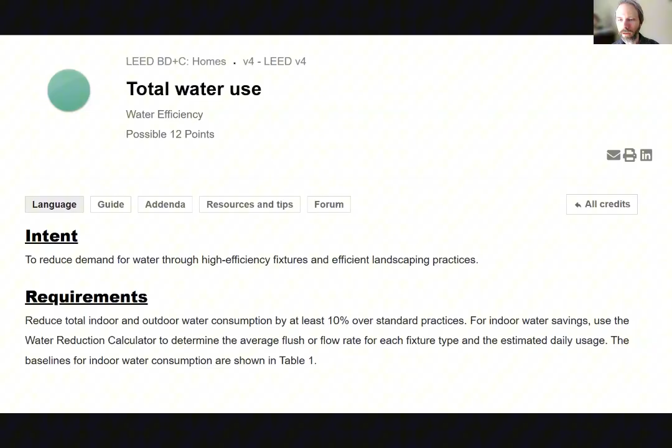Now, you can see here the points associated with the LEED pathways depending on how much water you can save and what reduction over the baseline, both including indoor and outdoor, which we'll get into in the checklist a little bit later at the end. But you can just see your corresponding reductions to point savings in the total water use pathway.

Now, a quick note for all of our friends outside of the United States and Canada, you will not be using the EPA tool, but instead you'll be using the USGBC's developed outdoor water use reduction calculator to evaluate your project. This is also the same as they use everywhere on the commercial rating system. With that being said, I don't want you to leave.

I think there's many tips and tricks we're going to discuss today that are going to help you consider how to save water. And because this tool was basically designed off of EPA's tool, I think you'll find value in this session to help you understand how to more accurately fill that one out.

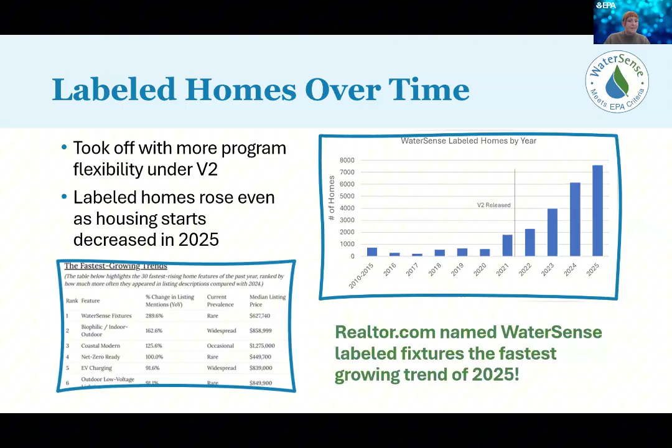And speaking of WaterSense labeled fixtures, version 2 of the specification includes just two mandatory requirements. A home must include WaterSense labeled plumbing fixtures, and they must be free of leaks. Beyond that, as I mentioned, the home also needs to be at least 30% more water efficient than a typical home on the market.

And version 2 of the WaterSense home specification, specifically for landscaping, has no mandatory landscape or irrigation requirements. Instead, outdoor water use is addressed in each of the HCO's certification methods in their own unique ways. We really rely on the HCO's certification methods to evaluate a home's outdoor water use. Reductions in outdoor water use are, however, still very vital to meeting that 30% requirement. It isn't really possible for a builder to reach that 30% goal by reducing indoor water use alone to achieve the WaterSense label.

Even though builders are not required to use the water budget tool anymore, it can still help them design landscape and irrigation systems that are more water efficient. And to be extra clear, we didn't remove the requirement for using the water budget tool because the tool isn't effective. We did it to give builders more flexibility and to rely more on HCO's existing infrastructure to evaluate the home's overall water use.

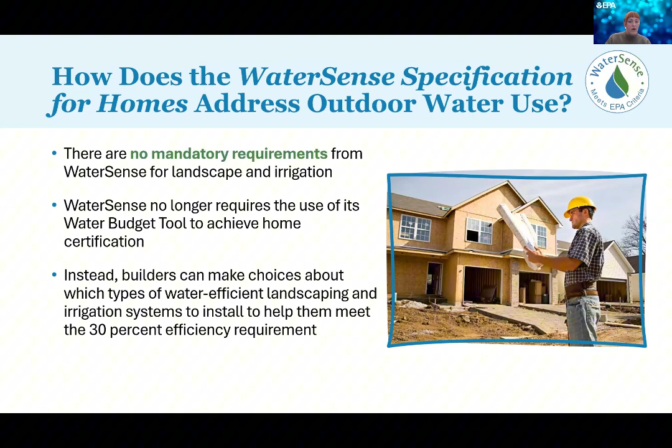And then again, to achieve the 30% efficiency requirement, builders choose a WaterSense home verifier and an approach using one of WaterSense's 4 approved HCOs. Each HCO has a certification method, which EPA reviews and also approves for ensuring a home uses 30% less water compared to typical homes in a variety of climates and regions. For example, if a builder is using RESNET's HERS H2O method, they should look for a score of 70 or lower to ensure the home is 30% more efficient than typical homes in order to earn the WaterSense label.

And similarly, there are maximum performance scores under the CHEERS WaterSense method, Green Builder Coalition's Water Efficiency Rating Score, and Home Innovation's Water Rating Index. Home Innovation Research Labs also has a prescriptive method where a builder incorporates specific practices with the National Green Building Standard to meet the 30% efficiency goal.

Home verifiers are trained through individual HCOs and verify homes meet the HCO's methods, requirements, and performance thresholds. WaterSense oversees all these HCOs. We review any changes to their organization structure or certification method. And so, although HCOs effectively manage the certification and work directly with the home verifiers, EPA does have a fairly tight control on what the HCOs can and can't do. By approving these qualified organizations to utilize their existing certification process to certify and label homes for WaterSense, we are able to leverage an existing infrastructure.

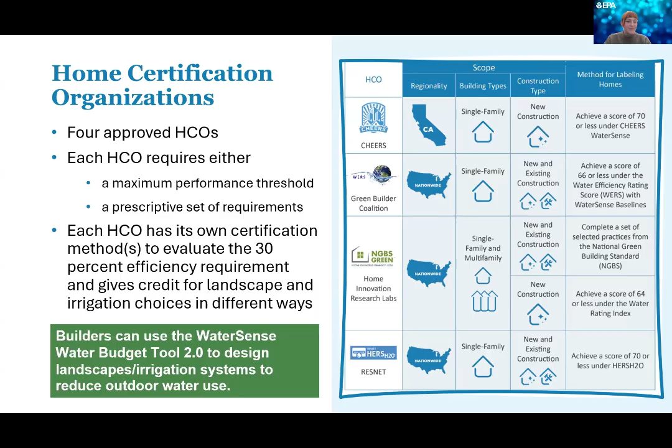Awesome. Thanks, Sarah. And hi, everybody. Still see my screen? Everything's good? Tech check? All good. Yes. Okay, good, awesome. Did you have a question, Brett, or are we good to continue? Just letting you know I could see your... Okay, awesome.

Thank you. So I'm Holly Cannon. I am with ERG. We are a contractor to the WaterSense program. We've been supporting them, and I've been supporting them since the program's inception in 2006. So it's been a really great, wild, long ride. I love to see that slide that Sarah showed about the growth of the homes program specifically. Being around for so long, it's really cool to see when you make a big specification change like that have such a profound impact on the number of labeled homes we're seeing, the amount of water we're saving. The program is just super great, super awesome. So thank you for being here to hear about it and hear about the water budget tool.

So late last year, my team helped EPA revise the water budget tool to include new data and assumptions that we have, and hopefully, like Sarah said, make it more usable for a variety of audiences now that it's not required by the specification anymore. I had originally set this presentation up just to talk about the changes from version 1 of the water budget tool to version 2, but I realized some of you may not know what the water budget tool is at all. So I'm going to quickly cover the basics.

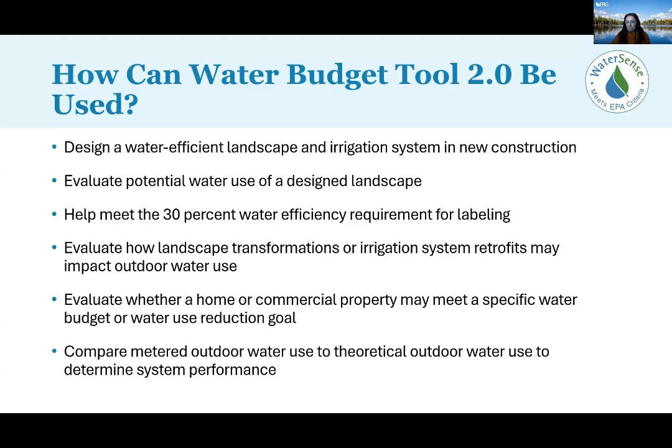We'll talk more about this. This is not the main use case, and I'm not saying everybody should go out and look at their water meter data and compare it. There are certainly caveats here, but that is one scenario that we'll talk through. And then Brett, as Sarah mentioned, will talk later about the LEED correspondence.

So without further ado, let me just stop sharing this so I can pull the tool up. And Brett, you can tell me if I'm doing this right once I get it going here. Okay, awesome. And are there any questions you want to get to? Go ahead. Okay.

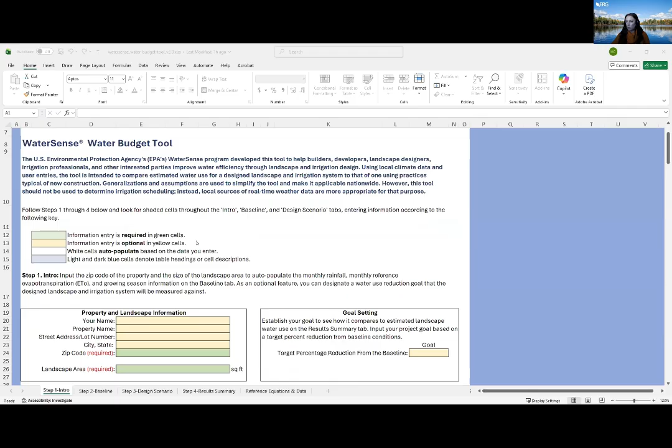Yep. Okay, cool. So here's the water budget tool. For those familiar with version 1, it looks quite a bit different. We have 4 main tabs of inputs and some references and equations and data. But this step 1 page really just gives you some background. It talks through what our color coding means.

Only green is required information. Yellow is sort of optional depending on your use case. White is going to auto-populate, and then any blue coloring is really just formatting, so that's ornamental. And this tab tells you what each tab is for, what they do, what date this was updated. It provides you the link. It's our baseline information tab.

I have three scenarios I want to walk through today, but I'll walk through the first one and then I'll talk to you about the background equations, so you can first see how it operates. We'll go through the equations and then we'll do two more quick scenarios. Hopefully we have time for that.

So my first scenario here is, and in an ideal world you'd fill all this out, but we're not going to do that, my Utah new build, and all of my examples are single family. Brett, right before this, was like, "Hey, do you have a commercial scenario?" And I don't, but he does. So good news there. So we're going to work through some single family scenarios here.

In this hypothetical scenario, I'm going to build a water efficient landscape and irrigation system that's going to reduce water use by at least 30%. So here's where I can put in my goal. So I'm looking for 30%. And I am in South Jordan, Utah, where there's a lot of new construction.

South Jordan, Utah also has several outdoor requirements in their local municipal code. So when I'm using this tool, I want to make sure I'm incorporating those requirements that they have. So I'll go ahead and put in my South Jordan zip code, which is 84009. And my landscape is going to be about 3,100 square feet.

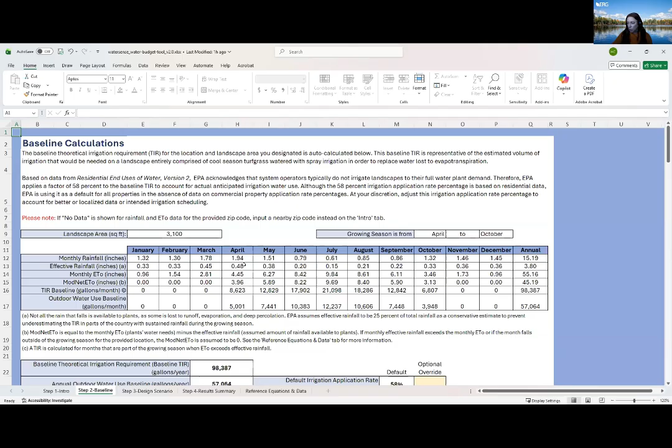So what I did instead is this zip code is for sort of the western side of South Jordan. I looked over at the eastern, central, more developed sides, and I'm going to plug in their zip code because I think it's close enough. And that's going to help me still get the right plant ET and rainfall and all that. Okay, so I'm all good there. I've corrected that zip code. All this data is being pulled in. Again, white means I don't have to do anything. So it's all auto calculating. It's pulling in the landscape area I said, and then it's calculating all this information.

And so what this is doing here is it's pulling in my monthly rainfall in inches for that zip code. And then we are calculating what the effective rainfall is. That's the rainfall that we believe is going to actually be usable by the landscape. And we're assuming that it's 25% of the monthly rainfall. That's a kind of baseline conservative estimate that WaterSense uses for effective rainfall. Then it's pulling in my monthly ET. And I'll talk about what these sources are once we review the reference equations and data.

And then it's calculating my mod net ET. So my mod net ET is going to be my monthly ET minus my effective rainfall. That's what my plant is going to need. So my plant needs its ET replaced, but if we're getting enough rainfall, in fact, if we're getting more rainfall than ET, this mod net ET may show up as a zero. It's going to say rainfall's got you. You don't need to add anything else to this landscape. It's also going to show up as zero here if you are outside of the growing season.

And this is a major new change that we added. So again, I'll talk through on the reference equations and data tab how we got there. But up here, you'll see that for South Jordan, Utah, my growing season is April to October. So any month that is not in those months is going to show up as a zero. My theoretical irrigation requirement baseline is going to populate here, and I'll talk about that equation again on the reference equations and data. And then my outdoor water use baseline.

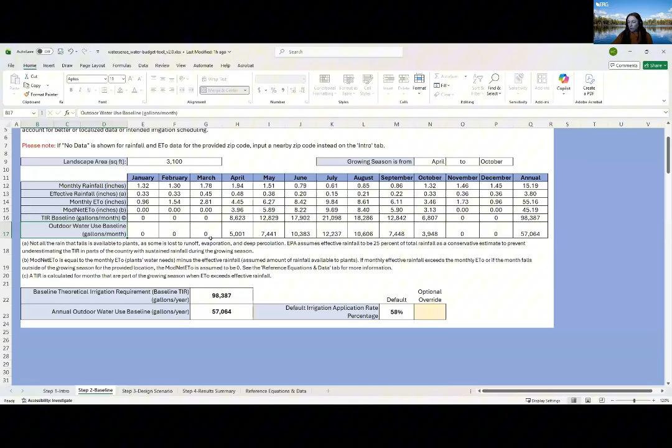So the outdoor water use baseline is calculated based on that TIR, but it's applying that irrigation application rate percentage that I talked to you about. And we have this information up here. So based on information from the residential end uses of water study, we are acknowledging that operators are not irrigating landscapes to their full plant water demand. That study indicated that users are actually putting about 58% of the baseline theoretical irrigation requirement on the landscape. So we're applying that application rate of 58% to that baseline. So we're assuming this is actually what the user is going to do. Okay, that's your outdoor water use baseline.

Now, you can adjust that if you know that you're applying more. In one of my scenarios, we'll talk about this, kind of keeping up with the Joneses next door. They got a really green yard. I'm applying more than maybe I want to or would. If you have a better number for this, we're allowing you to override. We've also anecdotally heard that commercial system operators typically apply closer to 100% of the plant demand. So if you have a commercial landscape, or multifamily, maybe you might want to set that in there and assume your baseline is higher than what we're assuming with this 58%.

Let me see if I have anything else on this slide. I think that's it. Okay. So this is our baseline. It's all calculating. We're going to go over to our design scenario. So let me explain.

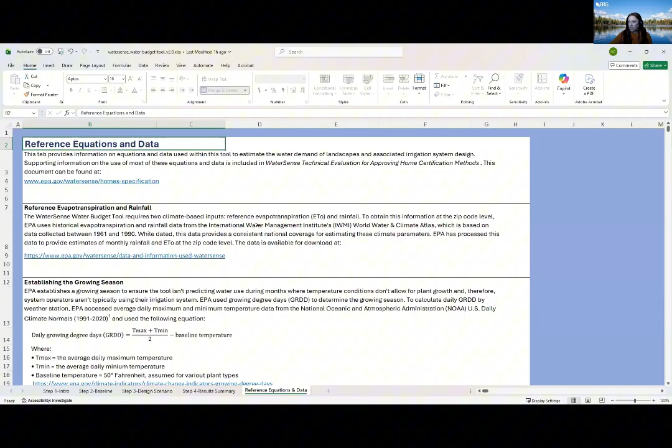Our reference ET and rainfall, we're using the same sources we used in version 1. It's the International Water Management Institute's World Water and Climate Atlas, and that has an average monthly ET, maybe even daily, from 1961 to 1990. So it's a little bit dated, but we've looked for a better source, and we really feel like this one just provides the best consistent national coverage for estimating these climate parameters. And we've processed that and provided all the data here at the zip code level. So this is both reference ET and rainfall from that same data set.

So then we established the growing season, which we felt was really important because when you start looking at annual water use, it may look like you have an ET need in December in Boston because the plant need is outweighing the precipitation potentially. But we know that nobody's irrigating in Boston in December because it's cold and your system's going to freeze, and you don't need that. So instead, we wanted to establish the growing season and make sure we were being more realistic.

So we use data from NOAA, the National Oceanic and Atmospheric Administration. We use their daily climate normals from 1991 to 2020. And we calculated growing degree day using the daily temperature minimum and temperature maximum, and we subtracted a baseline temperature. This is a pretty standard equation for growing degree day, or GRDD.

So you're going to calculate the GRDD, and if it is positive, that is a growing degree day. So if your average temperature is greater than the baseline plant temperature of 50, that's a growing degree day. If it is negative, it's not a growing degree day, it's just zero. So we assumed that any month with more than 50% positive growing degree days was part of the growing season.

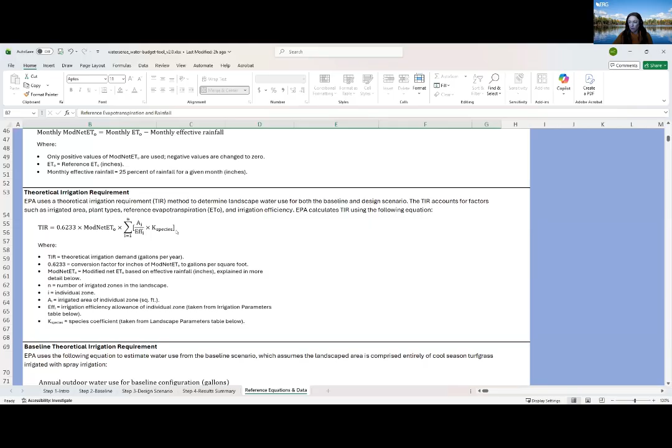And then the baseline is going to take that theoretical irrigation requirement and apply that irrigation application rate percentage of 58% in our assumed scenario. We're leaving that 58% default because that's what the Residential End Uses of Water study told us is happening in the field. Again, you can override that if you have something better to use.

And then the design scenario is doing the same thing. It's still applying that 58%. It's using your potentially more efficient landscape and irrigation system, and it's going to add it up in a similar way. So here are our species coefficients. We've streamlined these selections a little bit from version 1 to bucket things a little more. And then same with our irrigation parameters, so you really only have a few choices here for your irrigation type.

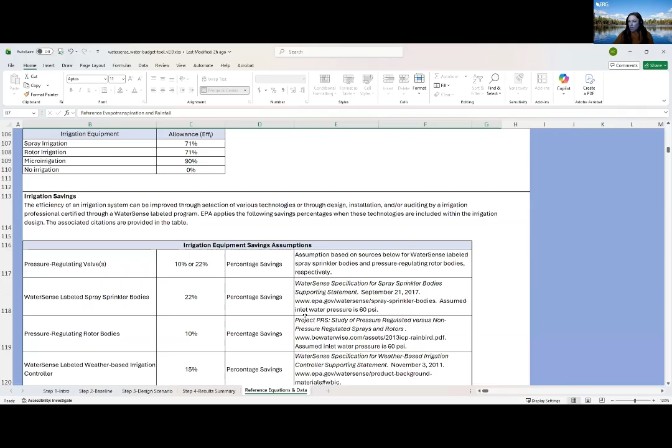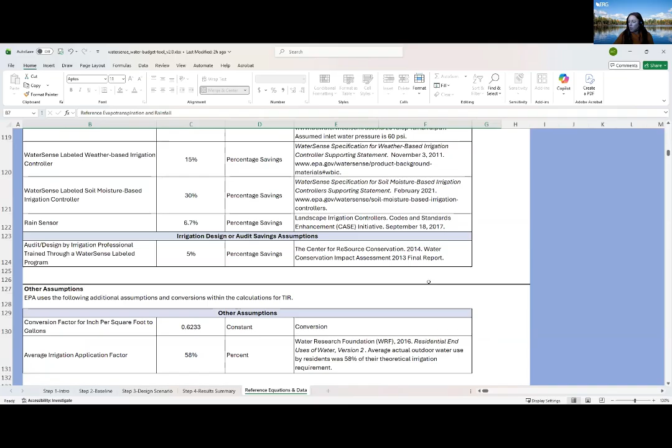And then there's all those savings that apply system-wide. Here are all of our assumptions there and the percentage that we're assuming. You can go look at our background if you want to. And here are a couple of others, that conversion rate and the irrigation application factor. We gave that resource here as well. So that's the gist of it.

Brett, if you want me to pause to take questions, I can do that, or I can keep running through my other two single family scenarios. Yeah, I think the clarification was you had mentioned something about multifamily or commercial projects changing a number. Can you just clarify that one again?

Yes. So that is this application rate percentage. The data we're using for that is from the Residential End Uses of Water study, so it's a residential assumption. Through their analysis, they determined that operators of a residential irrigation system are applying about 58% of the actual landscape water need. Now, we don't have any data for a commercial landscape, so we're assuming 58% across the board.

However, we had some peer review of this before we released it, and anecdotally, somebody said commercial property owners are actually applying closer to 100% of the landscape water need. So that 58% may be ratcheting down that baseline a little too much. I see.

You can right here, and I'll show it in my next scenario, override, and that will give you a higher baseline, and it's also going to assume you're using more water in your design landscape.

Okay. Yeah, and I'm glad you reminded me of the end uses of water because I know we had them on when they had the last report come out several years ago. I think the next one is due this summer. We're going to have them on again. When that comes out, would that then necessitate a version change on this if they have new data? Potentially, yeah. I haven't seen even preliminary results from that yet.

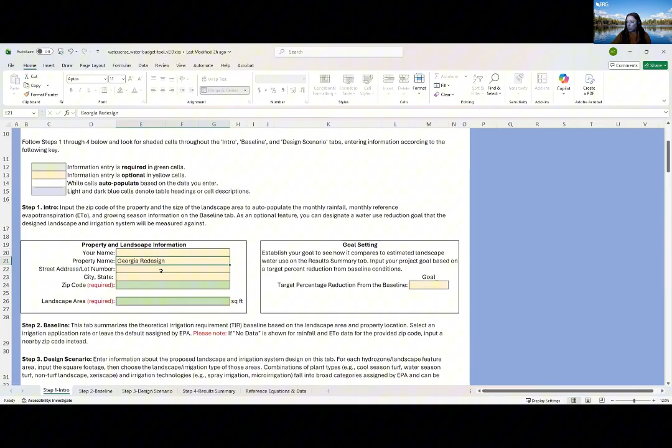So property name, we'll call this our Georgia redesign. And I'm just wondering when I make all these changes, how is my water use going to be impacted? So that's what I'm using here. So I'm in Augusta, which is 30809, and I have a 0.3 acre lot, so a little bit bigger than Utah. Again, not brand new construction. I have about 10,000 square feet of landscape that I could potentially irrigate, and that's subtracting the home footprint, the driveway, the walkways, and a small patio that I already have.

Okay, I have no goal, so I don't have to populate anything there. Let's go over here, make sure I have no errors. It's looking good. It pulled in my zip code. So I can see that my annual outdoor water use baseline is 145,000 gallons. So this is my keeping up with the Joneses scenario. My neighbors' grass is green, so I'm not going to skimp on water use here because I want to look as nice as they do. So I'm actually going to up this to 80%. It's a little bit arbitrary of an assumption, but I'm assuming I'm applying more than the average user, because I'm really trying to look good in the neighborhood.

So that'll give me a higher water use baseline here, and it's also going to assume that I'm going to apply more water in my design scenario. So I'm over in my design scenario, and we'll again go back to the top. So I have zone 1, which is the plant beds near the house. Zone 2 is my turf. It's just a really small plant area, and the rest of my landscape is turf. So this is non-turf plants. I'm going to assume it's all spray irrigation, no pressure regulation.

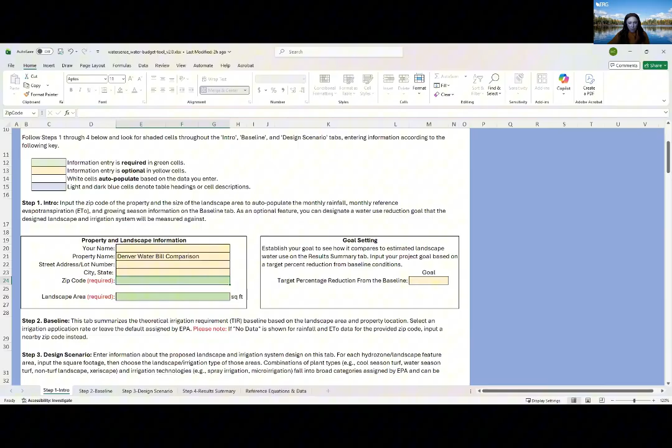So she is in Denver. Let's see. Oh, I hope I remember her number. I might actually have to Google it because I don't think I have it written down. Give me one second here. So this is her zip code here in the suburbs of Denver, and she has about 2,000 square feet of landscape.

This did not like 800. Okay, hold on one second. Here we go.

So here we are, we're in Denver. She's watering from May to September, which she said was fairly accurate. I got her landscape area plugged in. I'm assuming she's the typical user. I think she's probably irrigating to what EPA estimated she would be. So let's go to her design scenario.

She does not have a WaterSense labeled irrigation controller or a rain sensor. This is one of my friends, so she's an environmental scientist as well. So she is paying attention to weather and turning her system off when it rains, but she does not have a rain sensor installed. And no irrigation pro. So let's look at her zone.

So she has turf. She has a pretty sizable veggie garden. And then she also has a zone where it's landscaped but not irrigated. She said it's mostly just kind of mulched over. It's an area they're not really using. And I did want to show how the tool can account for that.

And then one more thing, I just wanted to mention that this tool is not meant to predict or help with irrigation scheduling at all. So it is giving you that monthly estimate, but users shouldn't be going in and saying, okay, in May, I should probably use 3,600 gallons of water. You really need to be using local weather data, real-time weather data, and scheduling based on that information, not what this tool is putting out. So, yeah, so that's it.

I'll hand it over to you, Brett, or I can take more questions if we have them. Well, one of our guests pointed out that the GDD, which was cool, I hadn't heard of growing degree days, was similar to CDD, cooling degree days, in the same way we use for HVAC calc.

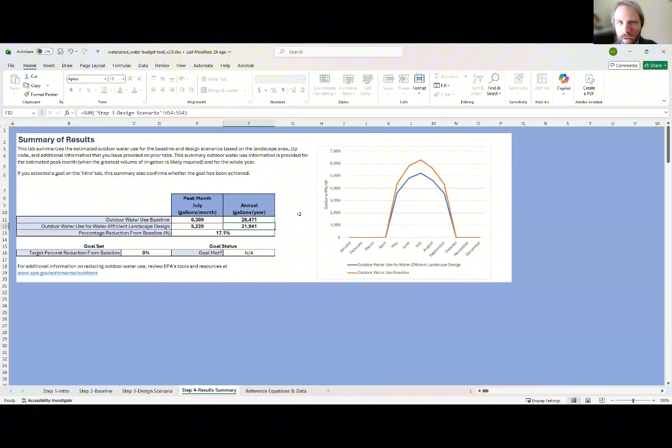So would you say in a similar sense, if we do energy modeling, there may be deviations, hotter or cooler one day, so it's diverting from the model. So would you say, same logic here, that you would just look, are your GDDs different than what this is saying, and that it might explain a deviation? Absolutely. Yes.

Okay. So yeah, if you're spot on, you want to think, okay, does that make sense? Am I kind of the typical user? All right. If you're way off one way or the other, you've got to think through why that may be. Yeah. And maybe you're under irrigating and your landscape still looks good and you're happy with that. And you're like, look at me, saving more water. Great.

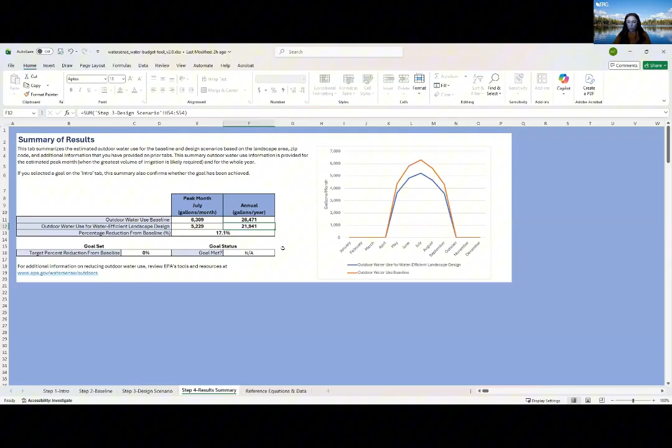If you're vastly over, that's when you really want to question, could I save more? Is there a dry year going on? What's going on? Why would I be putting so much more water on the landscape? Yeah. All right. Well, before we get into questions here in a second, just want to jump into a couple tips here for LEED, just briefly, and then we'll get into those questions.

And so I have confirmation from GBCI that you can use version 2 if you like it, or version 1 you can still use it, and no updates as to whether version 1 will retire. And so I'm talking about the EPA outdoor water budget. So you can use either one, whichever one you prefer. One thing you should know about the old one is that if you have a mixed irrigation, so you've got half of your site being irrigated and the other half not, like maybe you're irrigating the turf but not the native plants, you must then produce two different reports, two different water budgets, and then I believe average them together.

It's a little bit quirky. And part of the reason for that is if you're familiar with the old water budget tool, you will see there is a question on it that asks whether the site is irrigated or not. And you will notice if you've got this new version downloaded that that question does not exist.

So while we were doing this webinar, I actually emailed USGBC back to say, look, this new one is smart, right? It allows you to mix and match irrigated and non-irrigated sites. Are you really going to make people do two of these now? Can they just do one? So again, I won't get that response for a long time, but we'll make sure to get that out to all of our LEED raters, LEED partners as an update on that.

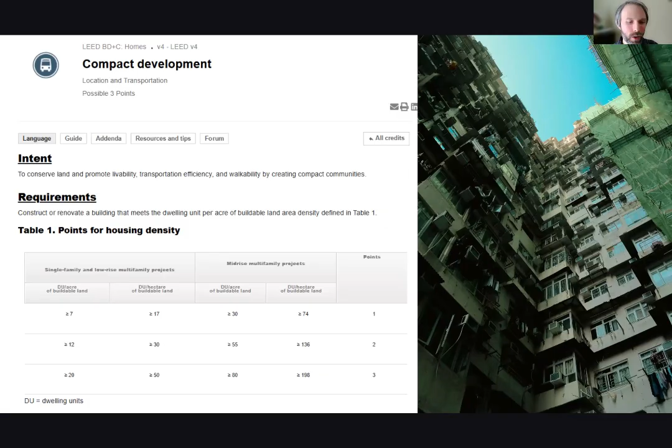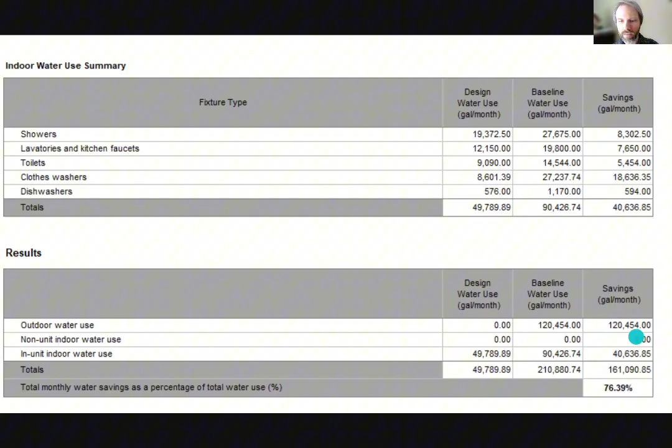And then with the outdoor water budget savings we use, you can see our outdoor savings, including the wetland, and then that gives us a total of nearly 80% from baseline in water savings. So here's what it looks like in the new version 2 outdoor water calculator.

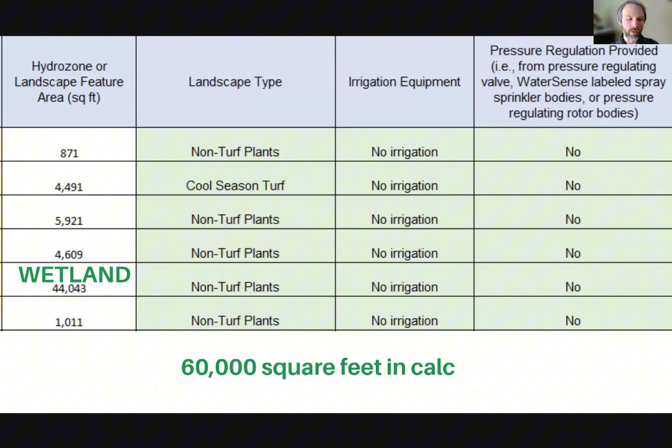And so, this is a 60,000 square foot development with the vast majority of the landscape going into the wetland. So you can just see how much of an impact the wetland is making on this multifamily property. So you can see here, the other thing I want to point out here, these are our results, of course. This is our baseline, 120,000. And then this is our design landscape, which is 0 because none of it's irrigated.

Now, as you will see in the LEED program, your results use something called LWR, Landscape Water Requirements. And so if you're familiar with LEED and you're not new to it and you're looking at this new version of WaterSense, you're going to be like, wait a minute, there's no landscape water requirement. What do I do? I'm panicking. I can't use it. No. So this is that right here.

This on that third tab, the summary tab, the outdoor water use, water efficient landscape design. That is going to be your new LWR, landscape water requirement. So again, here you can see it's 0 because we have no irrigation on the site at all. So it is 0 water irrigation for the site.

And so you can see right here, this is the workbook, the LEED workbook that sits above the indoor water use data. And so this is our baseline, 120 there. And then this is our landscape water requirement, again matching the 0 here with the outdoor site. And so what this does in the workbook, if you head over to the water efficiency tab, you'll see it populates a 76% water savings.

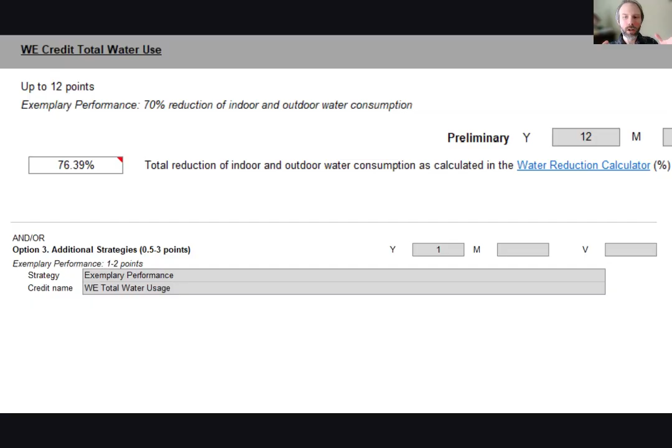Now, one thing I want to notice, if I remove that 44,000 square feet of wetland, the water savings drop to 61%, and that ends up being a 2-point loss. This goes down to 11 and we lose this because we fall below the 70%. And we would then actually gain a point by shrinking the LEED boundary under the compact development. So we lose 2 in water, gain 1 in the other one. And so you can see here in this case, it's marginal, it's 1 point, and I've seen others swing other directions, but it behooves us to include the wetland as opposed to trying to get the compact development with LEED.

Now let's take a quick look at our Green Star Home certification. If you're using our Green Star Home certification program, the first thing you want to do in the workbook is make sure you drop in the number of bedrooms. That's going to power your home water score. And then if you tab over to the home water score, you will see I input the data for that same multifamily case study we just talked about. I input what the flow rates are in each of the indoor water use.

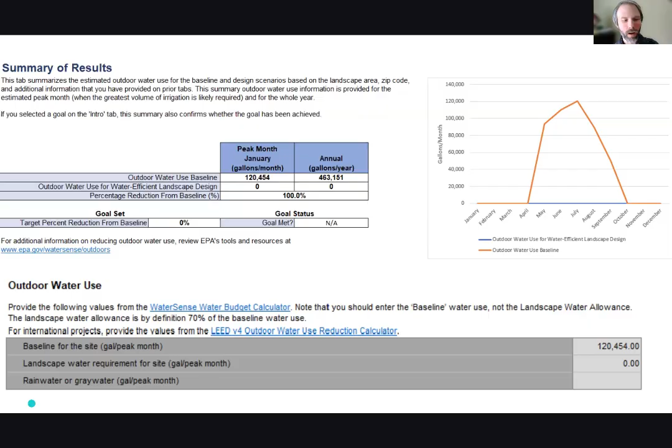And then I believe for Green Star, we're not going to do what LEED does, which is the peak. We're going to do the total water use to be more accurate in our water use. So you would put the total water use over here, and then you would put that here. But you can already see there's a glitch if you know our home water score program. Number one, our home water score doesn't go above 10. So it's already glitched out.

And second, we're not going to allow 0. We're going to actually probably require that you have to consider hand watering in many cases. So now that this new tool doesn't consider that like the old tool used to do, we have to go back to our technical committee and determine how we're going to handle that. But for now, that just gives you an example of how this gets inserted into our Green Star workbook.